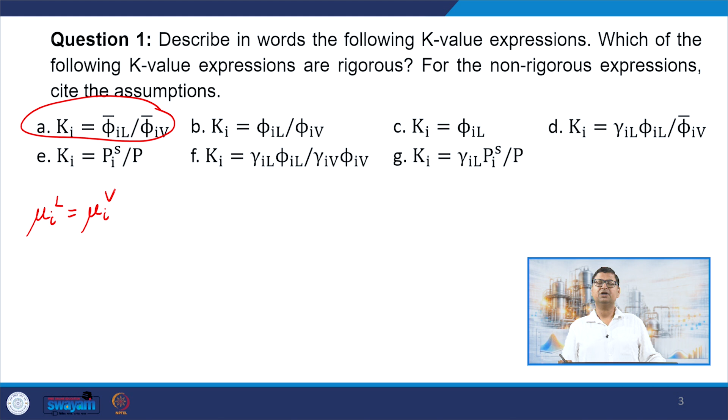So the first one is this, which is actually rigorous. We can quickly derive that expression. We can start from mu I L equal to mu I V for the vapor liquid equilibrium.

So it is clearly correct. The second one, although it appears to be correct, is not correct, because these are referring to the pure component fugacity coefficient. Phi IL without the over bar is defined as something like

Fi by P, as opposed to phi IL bar, which is defined as Fi bar by Xi P. So clearly the pure component fugacity coefficient need not be equal to, in fact should not be equal to, the partial fugacity coefficient in the mixture. So this is based on the assumption that the fugacity coefficient is unchanged in the mixture, same as whatever we had for the pure component.

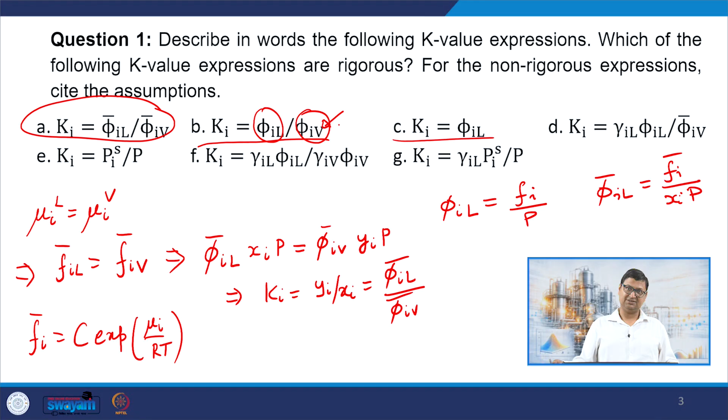In the third case we have dropped the vapor part, so that also means we are assuming phi IV equals 1. This assumes we have an ideal gas, because phi IV is assumed to be 1, and we are also taking phi IL to be the same as the pure component fugacities - both are assumptions here. So A is rigorous, B and C are approximate.

D, as we have derived in the last lecture, is also rigorous. E is what we have got approximating it as an ideal solution - we have got Ki equal to Pis by P. This Ki we have got here is also rigorous, because this looks very similar to what we had here. And in fact the last one is an approximation, because we are using some kind of a modified Raoult's law.

So A, D and F, these are rigorous, and the others require assumptions. For G, the assumption is modified Raoult's law. For E, the assumption is Raoult's law. And for C, we have assumed an ideal gas, and we also assume that the pure component fugacity coefficient of liquid is same as that for the mixture.

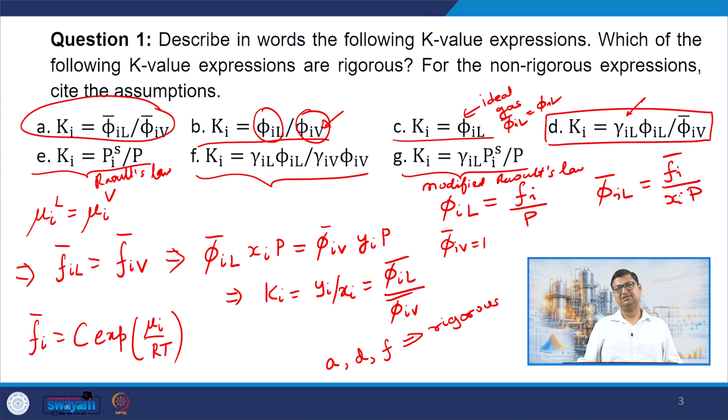And in B also we have an assumption that both the liquid and vapor partial fugacity coefficients are the same as that of a pure component.

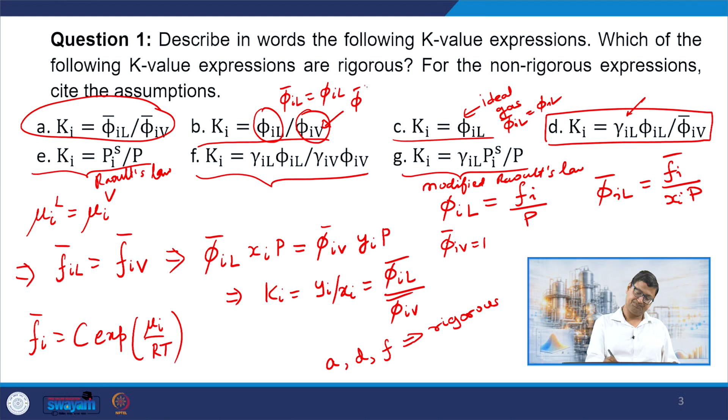Okay, let us do one more example. Here we are asked to show that the alternate separation sequences we can have for 5 final products with 4 columns is 14. We have done it for 3 columns in the earlier class, so we want to do it for 4 columns with 5 products, assuming that each column has 1 feed and 2 output streams.

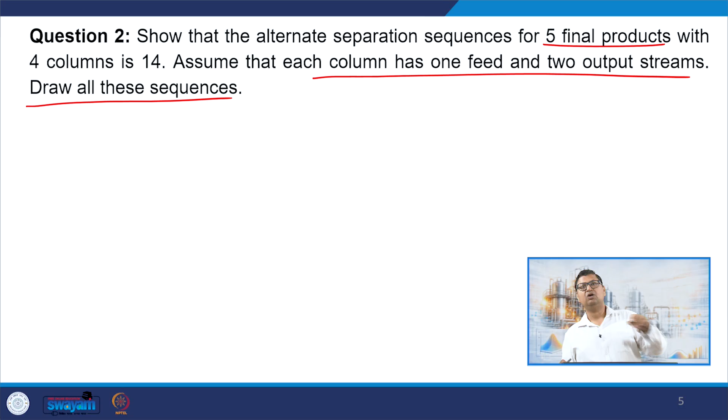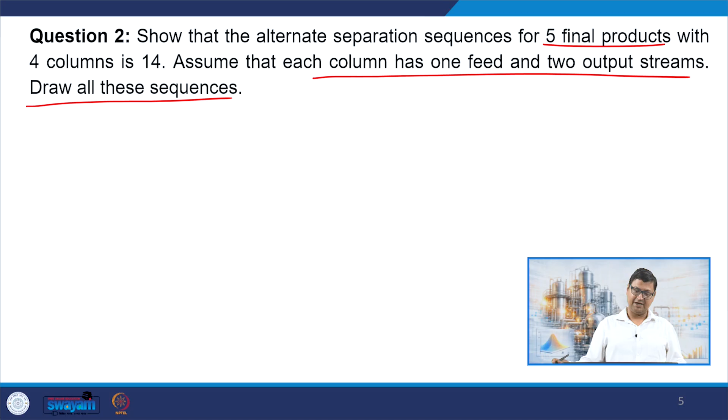We can of course do it by drawing all the flow sheets as we have done earlier, but I want to illustrate the same idea in terms of the trees that we have discussed in graph theory. So something like this, where I am extracting 2 products out of the second and third column, and the first column is basically getting the feed. I can also express this in terms of a graph.

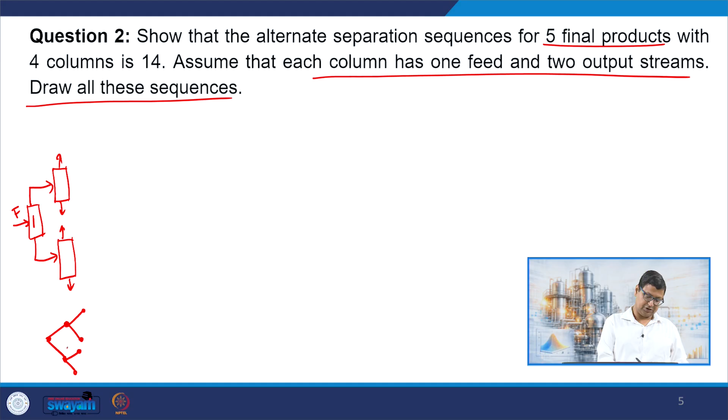That is something like this: the first one breaks into 2, and the second node breaks into 2, and this breaks into 2. So the nodes which are dangling, they are my product streams - here we have P1, P2, P3, P4. So the dangling ends or the free ends are my product streams, and all the other nodes become my columns: this is my first column, this is my second column, this is my third column.

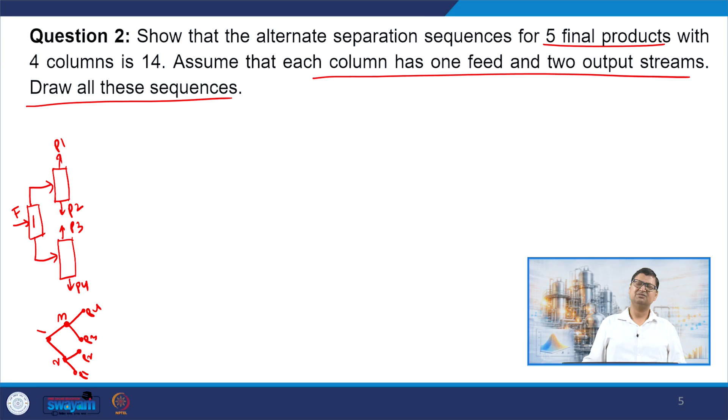So I can have a shortcut representation of the flow sheets using these trees, which would really make things easier once we have many columns involved. Let us try to quickly do the trees for this particular case. So one possibility is like this.

So we have 5 dangling ends that give me P1, P2, P3, P4 and P5. It doesn't really matter if we switch between P2, P3, P4 and P5, but what still matters is P1, whether we take it from the top or the bottom. This corresponds to 2 sequences, one where P1 comes from the top and another where P1 comes from the bottom. So we have 2 sequences like this, and for the other 4 it does not really matter. We can form one other kind of tree.

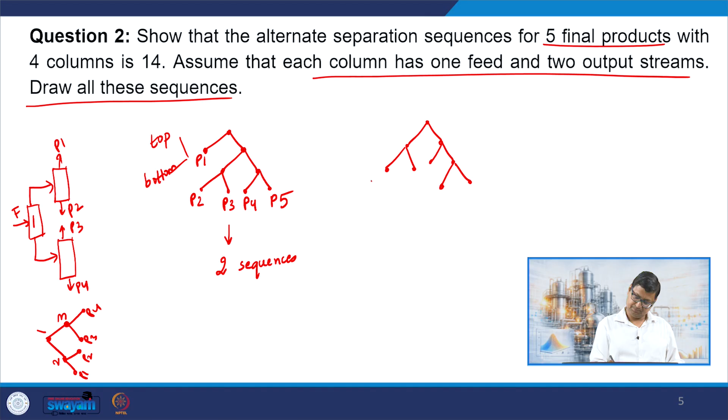Again we have this branch containing P1 and P2, where P1 and P2 we can interchange, but this branch can come from the top or from the bottom, so we have 2 sequences for P1, P2 together. Now similarly for the P3 branch, that can also be from top or bottom. So in total we have 2 into 2, that is equal to 4 sequences.

And finally we can have something like this, where P1 can be top and bottom, two possibilities here. P2 can be top and bottom, two possibilities here. And P3 can also be top and bottom. The P4, P5 order doesn't matter. So in total we have 2 into 2 into 2, that is 8 sequences. So in total we have 2 plus 4 plus 8, that is 14 sequences.

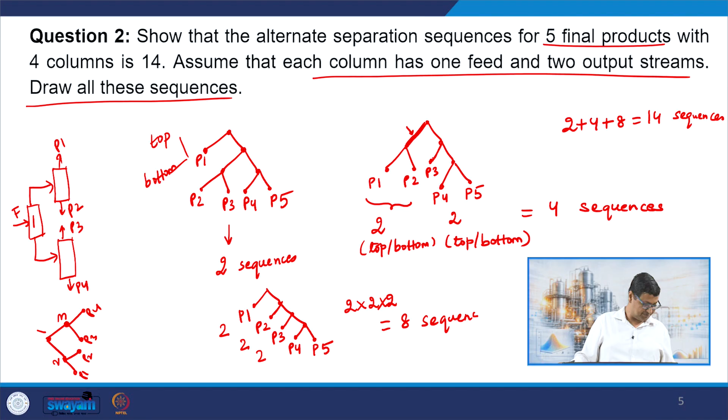Let us take one example of a solid liquid cascade that we can relate to based on our daily experience. One of the simplest or traditional methods of washing clothes - if you've been to a village and seen the old washermen, they used to wash clothes this way, before we had washing machines. This involves dipping clothes in a bucket of clean water for some time, followed by draining the dirty water. So it's some kind of batch process.

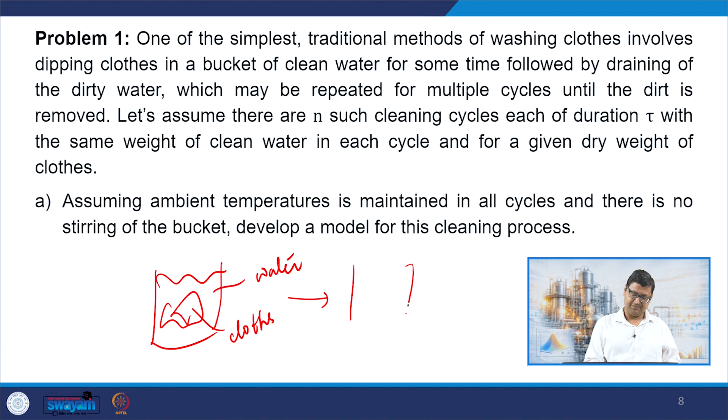You put clothes in a bucket of water - this is my cloth, and this is my water in a bucket - and then we basically drain it out. Once we drain it out, we have dirty water coming out that contains some dirt, and then we repeat the process again by adding fresh water. Every time you add water and wait for some time, provided the cloth is sufficiently dirty, the water will get dirty and you throw away that water and again add fresh water and do it again. You may ask, what is the point of doing this?

The point of doing this is because the dirt has some finite equilibrium solubility in the water. Once it achieves that equilibrium solubility, whatever water is there is no longer separating the dirt from the cloth. If I discard that water and add fresh water, the dirt may again start coming in and a new equilibrium is going to get established. So by changing water after some time, we get a new equilibrium, which gives a more efficient removal of the dirt from the system.

So let us assume there are n such cleaning cycles, where each cycle means I add water in a bucket and put the clothes in there, and at the end of the cycle I discard the water and again add fresh water, for the same weight of clean water in each cycle. I'm keeping that fixed, for a given dry weight of the clothes, and we assume the ambient temperature is maintained in all cycles and there is no stirring of the bucket. We have to develop a model for the cleaning process.

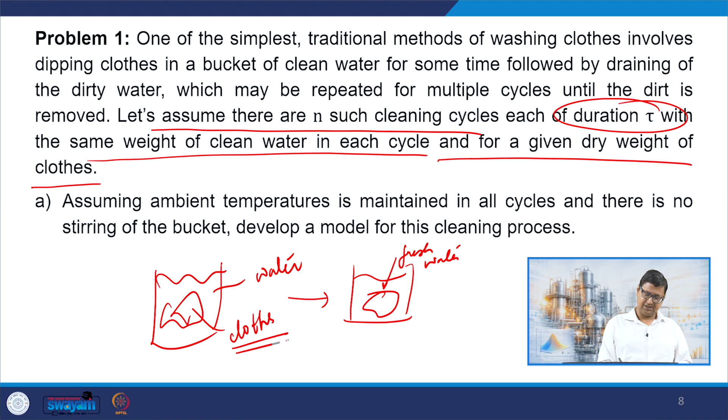What we also assume is that my duration tau is long enough such that equilibrium is maintained for the dirt in the water. Going back to the solid-liquid cascade example, I can imagine that my cloth becomes the feed. Of course it's a batch operation, but cloth becomes the feed, which contains an insoluble component, which is my cloth, and a soluble component, that is my dirt. Let me call cloth C and dirt D, and W, water, is my solvent that is coming in.

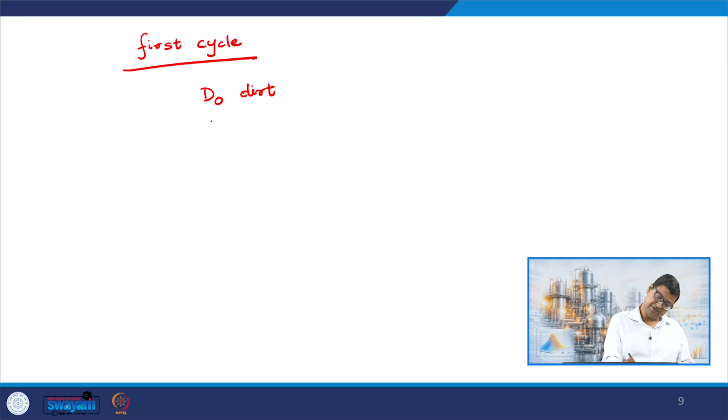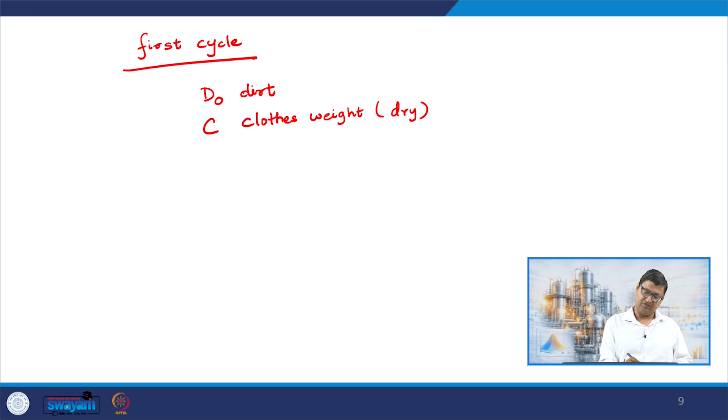Let us do it for the very first cycle. Let us say I added some water, let me call this mass S, just to differentiate from W, the washing factor we defined earlier. So in the first cycle, I begin with some D0 dirt in C cloth weight, and this is the dry weight of the cloth. Of course the cloth is going to take up some water, it will absorb some water, but this is the dry weight C. Let us say we are adding some S, referring to them as their masses, and S is the water that is added.

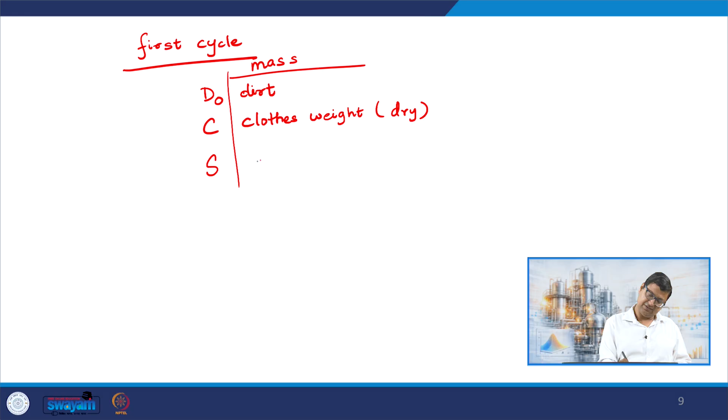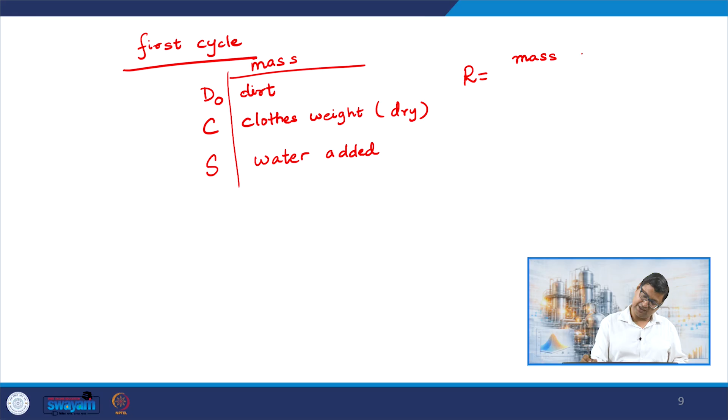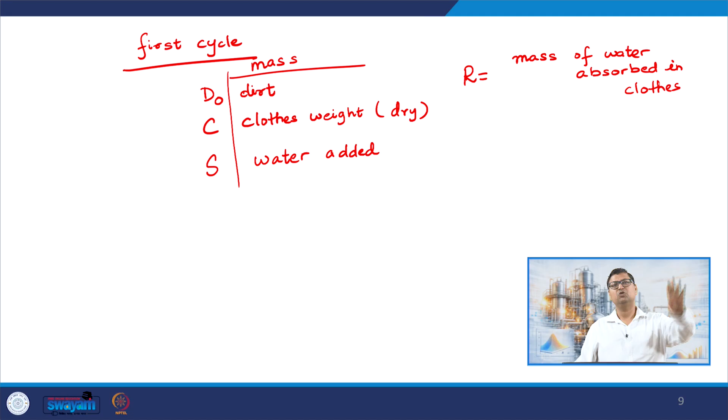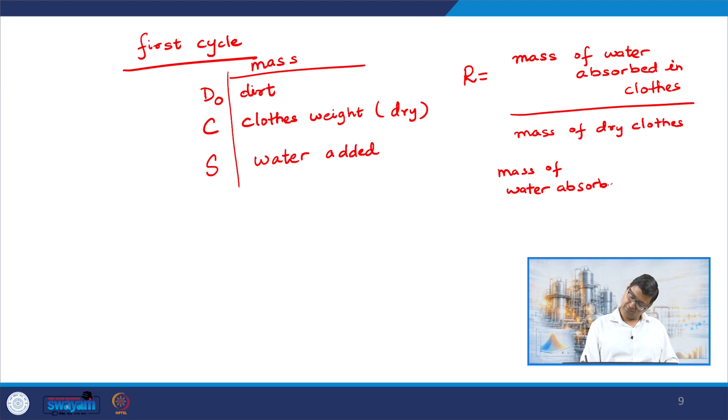So I can define some kind of quantity like R, which is the ratio of the mass of water absorbed in the cloth. The cloth becomes some sort of my underflow, except that it is a batch situation. Whatever is absorbed in the cloth is definitely going to get wet, and of course you are going to rinse the cloth, but we are assuming we are not rinsing it. We're just removing whatever water gets away out of this. So whatever is absorbed kind of remains there at the end of the cycle, divided by the mass of dry cloth. So mass of water absorbed is therefore going to be something like R into C.

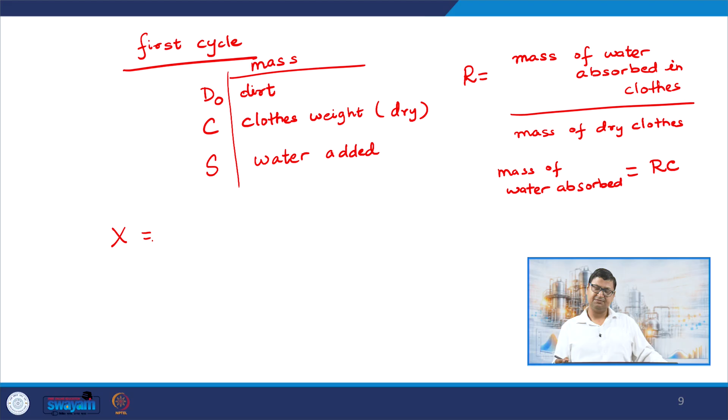Now I can define X and Y. X is the ratio of the mass of dirt remaining in the cloth. Let me call this D1, the dirt remaining after cycle 1, divided by the amount of water present in the underflow, which is my cloth, that is equal to RC. And my Y is whatever dirt which has been taken away. We had in the beginning D naught dirt, so D naught minus D1 will now go in the overflow. It will go away with the water, and basically it will be discarded after the end of the cycle. So D naught minus D1 is the dirt which has been removed in the first cycle, divided by the amount of water in the overflow.

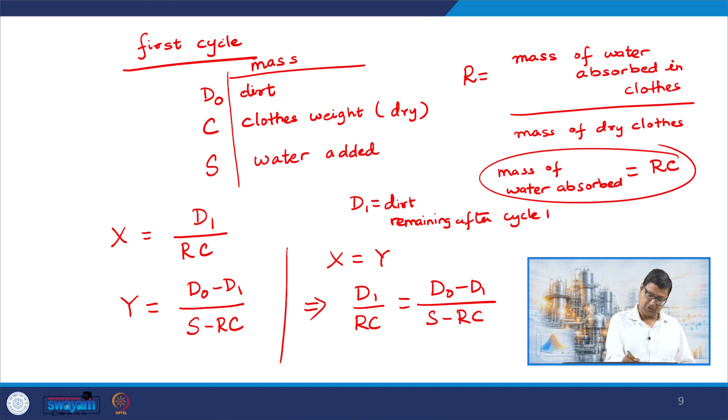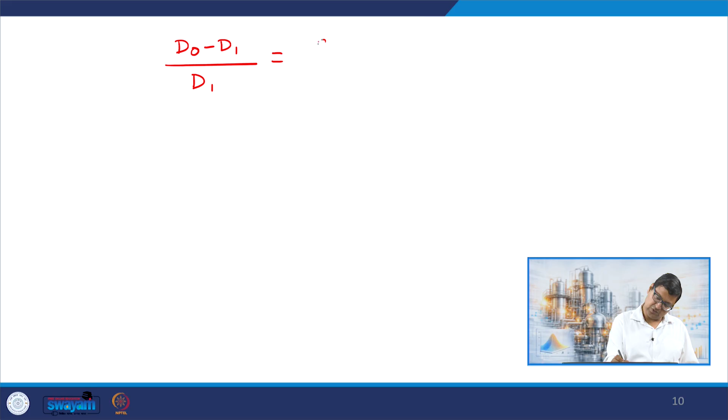So we started from amount of water S, out of which RC was absorbed, so S minus RC will remain here. We have the equilibrium condition X equal to Y, and that gives me D1 by RC is equal to D naught minus D1 by S minus RC. If I solve this, I get D naught minus D1 by D1 is equal to S minus RC by RC, and that gives me D naught by D1 minus 1 is equal to S by RC minus 1. Therefore D naught by D1 is some kind of washing factor W, and therefore D1 is going to be D naught by W. That is the amount of dirt remaining at the end of the first cycle.

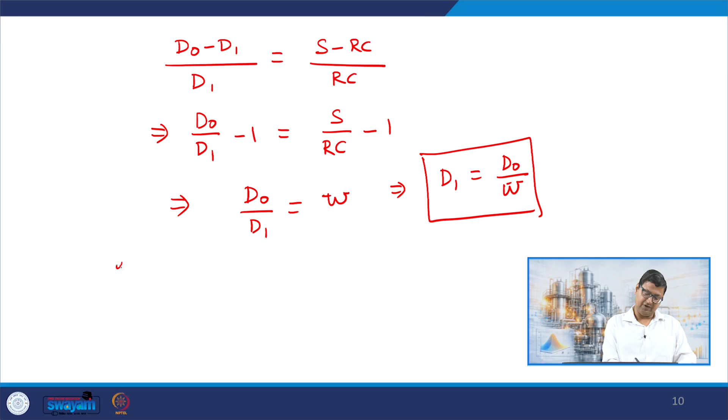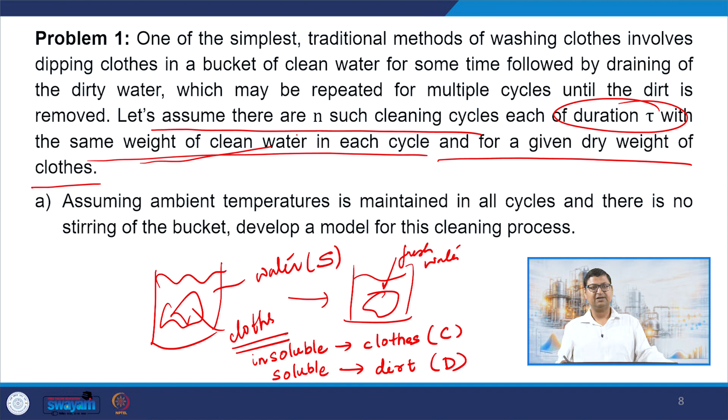Now I can go ahead and do it for the second cycle. What is given in the problem is at every cycle I am adding the same weight of clean water S, but now whatever is absorbed is already absorbed after the first cycle. So in the overflow, the amount of water will remain as S as opposed to S minus RC, because now the cloth before the beginning of the cycle is already wet. So for the second cycle, my X is going to look like D2 by RC, and my Y is going to look like D1 minus D2 divided by S. It is not S minus RC now because I am adding the same amount of fresh water.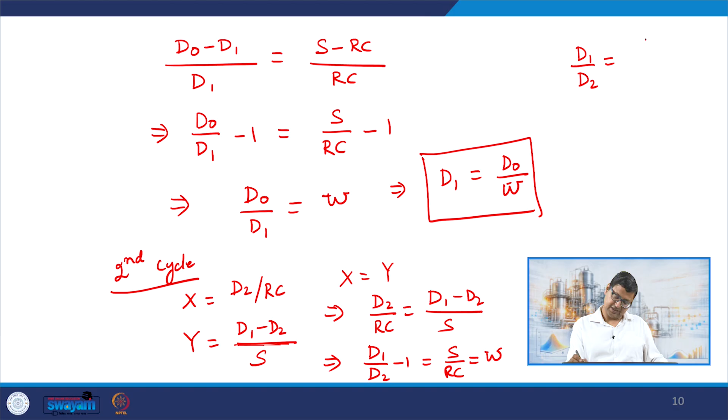Again I do X equal to Y, and that gives me D2 by RC is D1 minus D2 by S, and that gives me D1 by D2 minus 1 is equal to S by RC, which is my factor W which I have introduced. So my D1 by D2 becomes W plus 1. So my D2 therefore is D1 by W plus 1, but D1 is already D naught by W, so it is D naught by W into W plus 1.

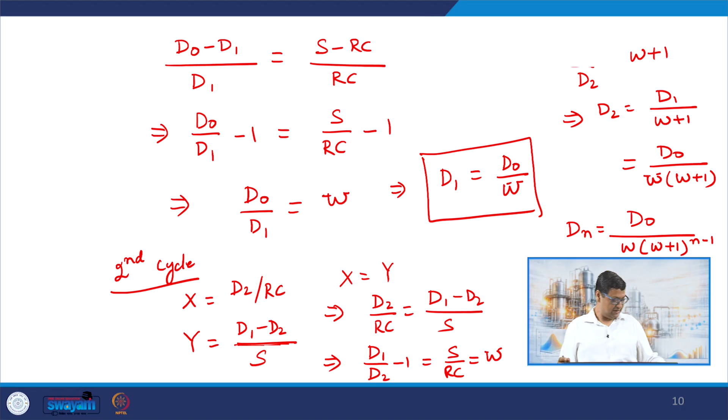The same thing is going to happen for all the remaining cycles. So in general we can write Dn as D naught by W into (W plus 1) to the power n minus 1. For the first cycle we have D naught by W, but from the second cycle onwards we also have a factor of W plus 1. So you can see I can also write the expression for a batch process in this particular way.

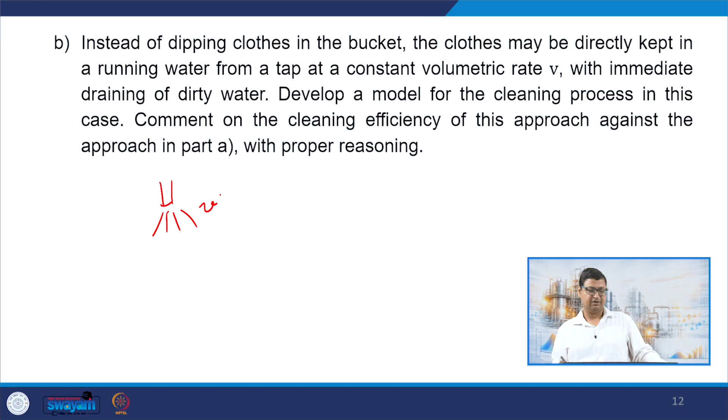Now the question asks, instead of dipping clothes in the bucket, let us keep the clothes directly in running water from a tap, coming at some constant volumetric flow rate, with immediate draining of the dirty water. So instead of a bucket, we now have an open tap, and the water is coming at some volumetric flow rate V, while the cloth remains in place. This is something like a semi-batch process because the cloth itself is not moving, but water is going away carrying the dirt.

Clearly equilibrium is not going to be maintained in this case because water is not remaining there for a long enough time. But let us say, just for the sake of argument, if I assume that this equilibrium is instant, then we can go ahead and try to model that.

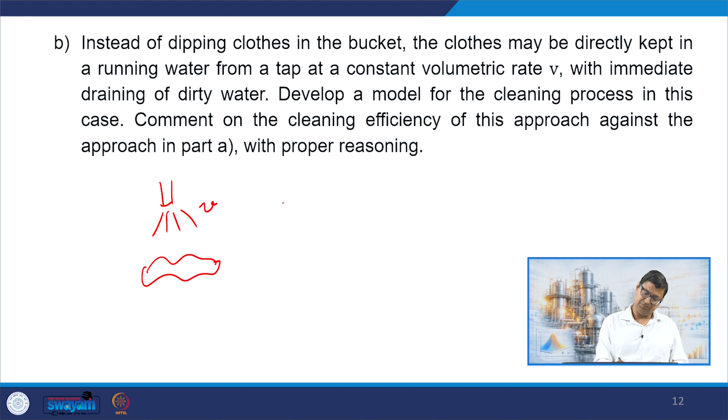So let's assume we have an equilibrium condition. Then you can imagine the initial part where the cloth will get wet and we will have a fraction of the solvent absorbed there. Let us include that, so that once it reaches that amount, it will remain with that.

Let's assume the amount of water absorbed is R multiplied by C, where R is constant after the water is absorbed. So the wet cloth weight is not changing. Whatever dirt is there, it is present in small amounts compared to the weight of the cloth, so the dirt going out does not result in appreciable change in the weight of the cloth.

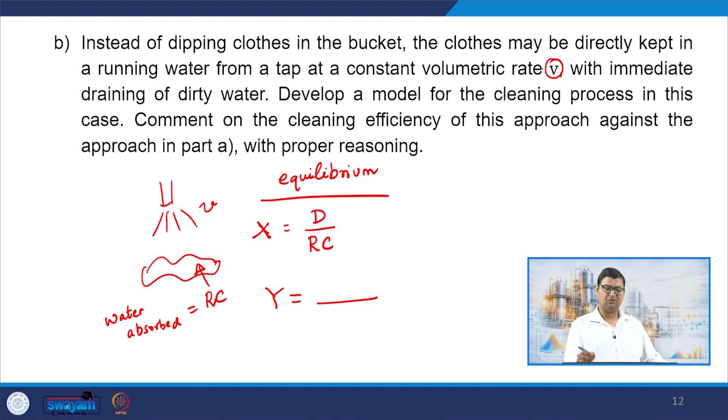So again, applying the idea of equilibrium here, my x for the cloth is the dirt remaining in the cloth divided by RC, and my y in the overflow is the mass flow rate going out, which comes in the denominator. It will be some function of the volumetric flow rate, but basically we multiply the volumetric flow rate with the density of the water. So rho into V gives the mass flow rate of water going out, and it is carrying the dirt at a certain rate.

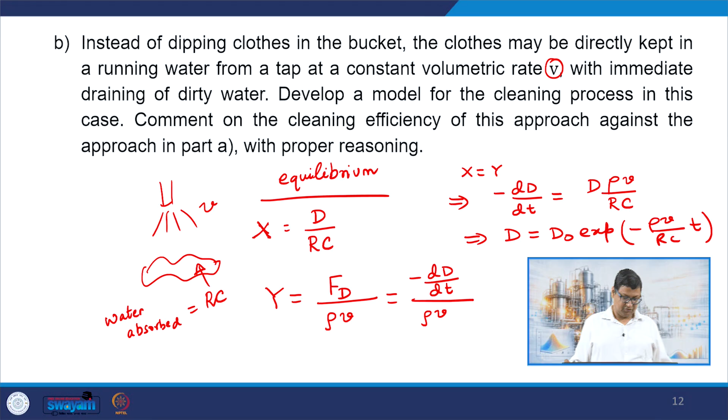Let us say the dirt is going away with rate Fd. So y becomes Fd, and Fd is basically the change in d that is happening, so this becomes minus dd by dt divided by rho v. If I now equate x equal to y, I get minus dd by dt is equal to d rho v by RC, which gives an exponential relation: D equals D naught times exponential of minus rho v by RC times t. So we can derive the expression for that particular case.

Now it is also asking that the use of hot water is expected to expedite the cleaning process. What does hot water do? Hot water essentially helps reach equilibrium faster, so my assumption becomes more valid. But in principle, it can also change the absorption taking place, because absorption is also a function of the temperature of the water.

If I add a detergent, in the worst possible case you can imagine the dirt is not going away at all. If detergent is not put in, the dirt only goes away when the detergent is there, depending on the kind of detergent. So essentially it is going to have a bearing on the parameter R, and therefore affect the washing factor. We have to appropriately modify the washing factor or the value of R to account for this as well.

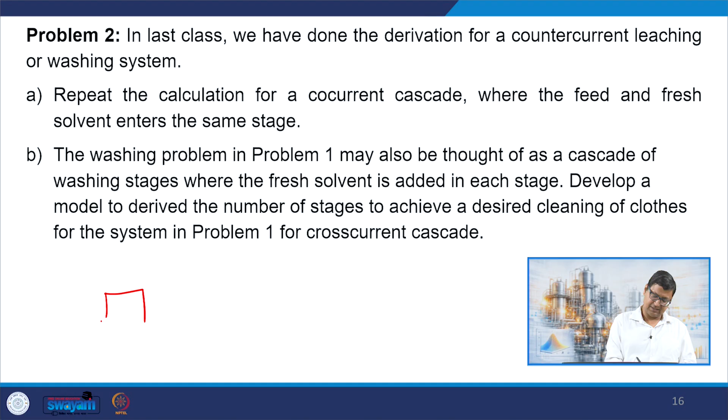Now, in the last class we did the derivation for a counter-current leaching cascade, and the question asks you to repeat it for a co-current cascade, where the feed and the fresh solvent enter the same stage. So we have done the counter-current version, but now we want to do a co-current version where my feed and solvent enter the same stage.

This also demonstrates why we should not do co-current. Let's say again we have Fa and Fb, where A is my insoluble solids and B is my soluble solids coming in. In the first stage, RFa is the amount of solvent leaving out, and S minus RFa is the amount of solvent leaving from the overflow. In the first stage, we make an equilibrium: X1 equals Y1.

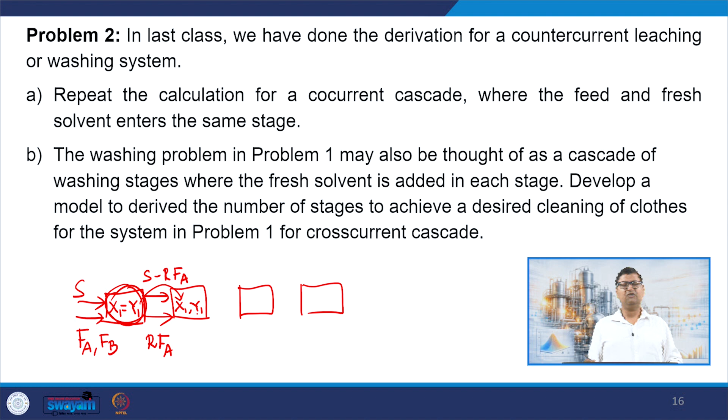I can write the material balance for this, but once it enters the second stage, it is the same liquid entering. There is no change once this liquid, after reaching equilibrium, goes from stage 1 to stage 2. So in the second stage we have the same value of x1 and y1. This is not like counter current operation, where the composition of the two streams changed because they moved in the counter current direction. Here they are both moving in the same direction, so it's like the same liquid going from one stage to the other. There's no reason a new equilibrium is attained, and that's why co-current staging is not at all helpful.

Provided equilibrium is attained, it will be attained in the first stage itself, and all subsequent stages are going to have basically the same thing.

Now we are also asked that the washing problem in problem 1 can be thought of as a cascade of washing stages where fresh solvent is added in each stage. Develop a model to derive the number of stages to achieve a desired cleaning of clothes for a cross current cascade. Now we have a cross current cascade.

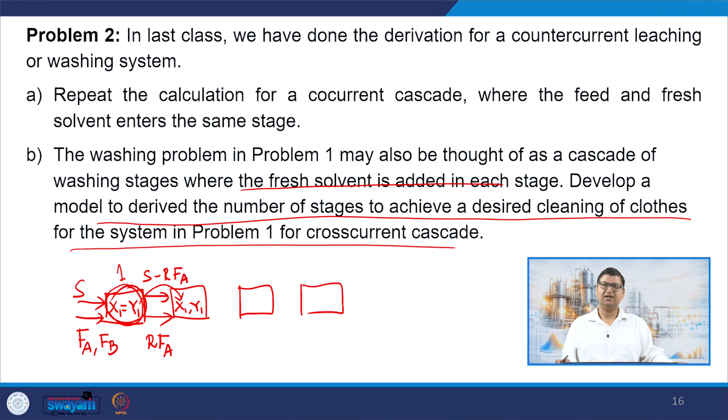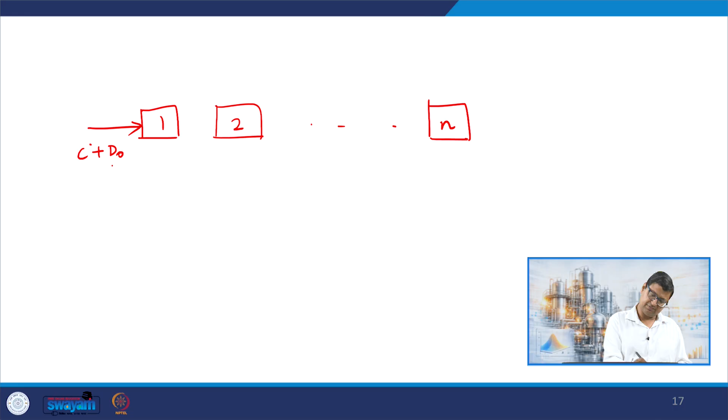So we can think about the same washing problem, but now done in a continuous manner, in a cross current cascade. What exactly will be a cross current cascade? We will have stages like this, and my clothes will enter here, along with whatever dirt is present. I will pass fresh solvent in every stage. So in the very first stage, let's say I have S amount of fresh solvent.

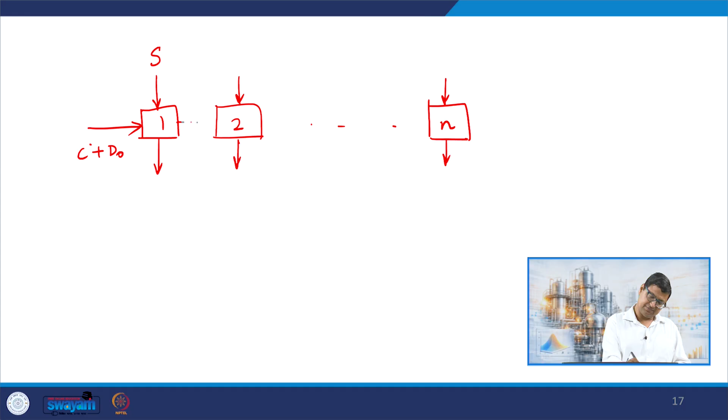Out of this, RFA will get into the cloth, and the remaining will only come out. But for the remaining stages, whatever S I have, the same S comes out, because the clothes are not going to absorb any new amount of water. So for all stages except the first, the amount of water coming in and leaving are the same. And let's say at the end we have some C plus Dn.

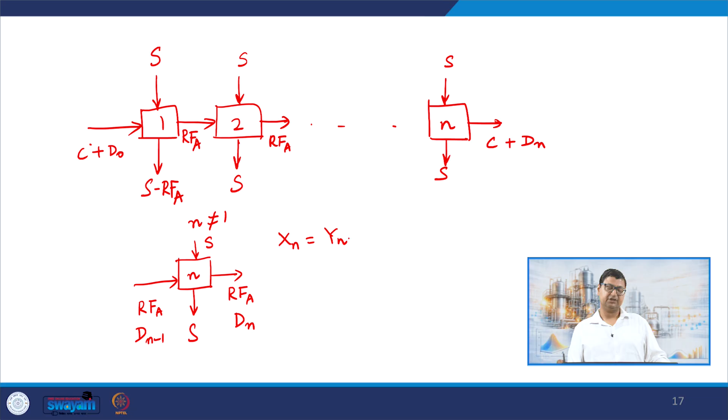So let's do the balance for the stage. For the nth stage, where n is not equal to 1, we have RFA coming in of the solvent, and RFA going out as well, but the dirt dn-1 is coming in and dn is going out as the mass of dirt, and S is coming in and S is going out. If I set xn equal to yn for the nth stage, xn is dn divided by RFA, and yn is the dirt removed, which is dn-1 minus dn, divided by the amount of solvent S.

So essentially we have an equation similar to what we obtained earlier. We can write dn-1 by dn is equal to W plus 1.

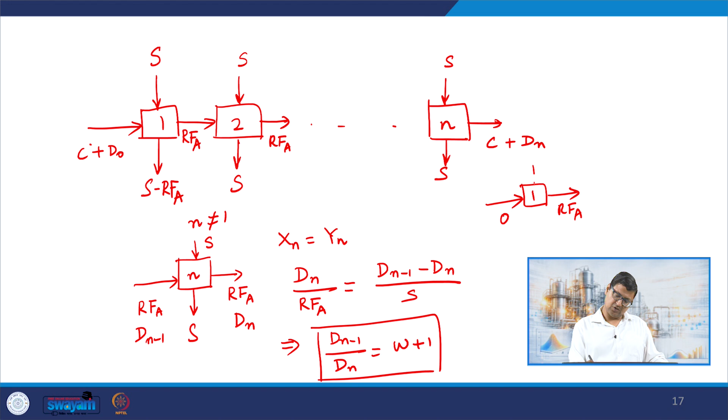Now for the first stage, we have a slightly different equation. We have essentially no solvent coming in, and RFA solvent going out, with S coming in and S minus RFA going out. So if we set x1 equal to y1, with d1 going out and d naught coming in, we get d1 by RFA equals d naught minus d1, divided by S minus RFA.

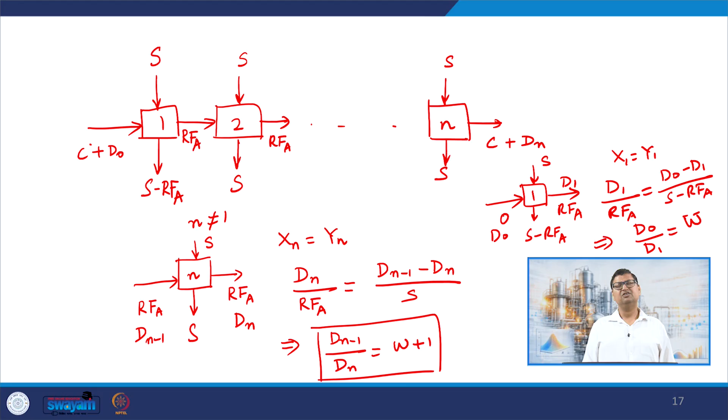If we do this, we get d naught by d1 is equal to W. Essentially we get the same relation we obtained earlier for our washing problem. So we have d1 equal to d naught by W, and dn equal to d naught by W, into W plus 1 to the power n minus 1.

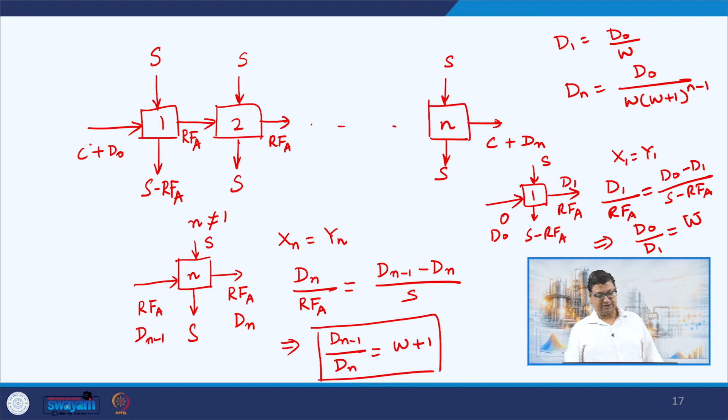So with that, I conclude this lecture on these examples. In the next lecture, we will take up some other separation processes like liquid-liquid extraction, vapor-liquid separations, and so on. With that, I stop here. Thank you so much.